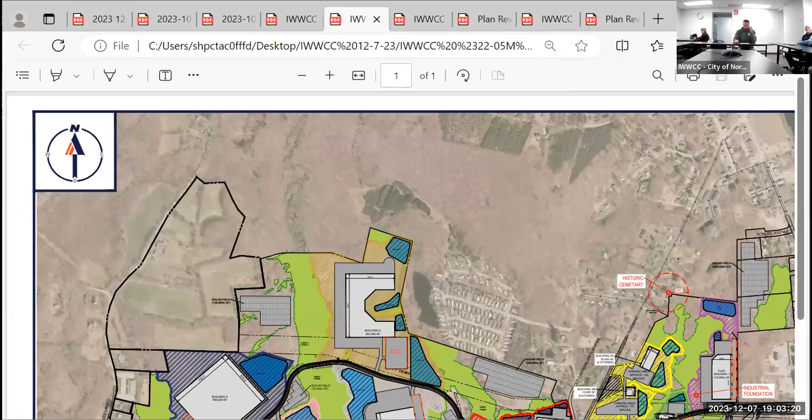As you recall, we were before this commission earlier this year for the approval of 7,700 linear feet of roadway spanning east to west from Route 97 to Lawler Lane. As part of that process, we coordinated with engineering, did the stormwater consistent with the 2004 Connecticut Stormwater Quality Manual, had E&S measures in place consistent with the E&S guidelines, and received approval from this committee back then.

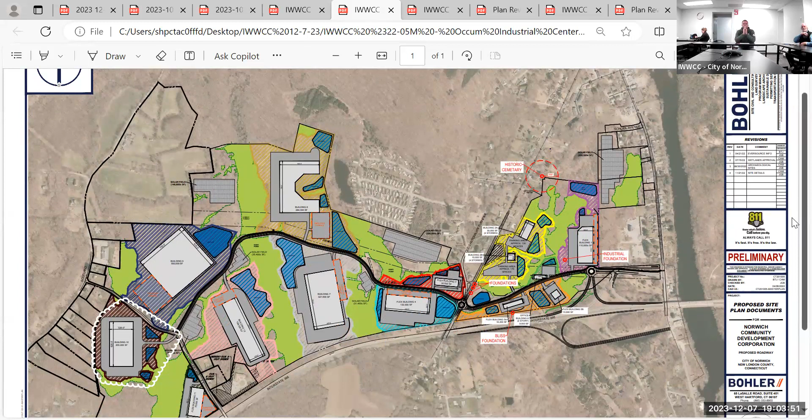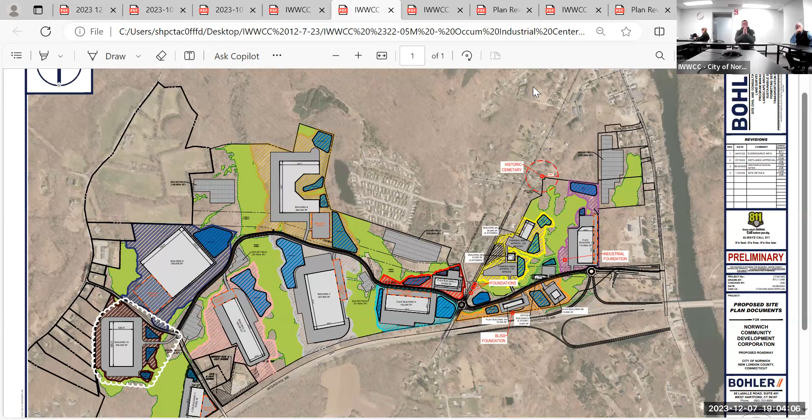We're here before you tonight amending that application, and there were just a couple of areas that Dan had highlighted. We highlighted them in white in the resubmission, and the changes are only limited to the terminus where Lawler Lane and the proposed road intersect, and basically that is a new driveway location that spans a narrow portion of the wetlands.

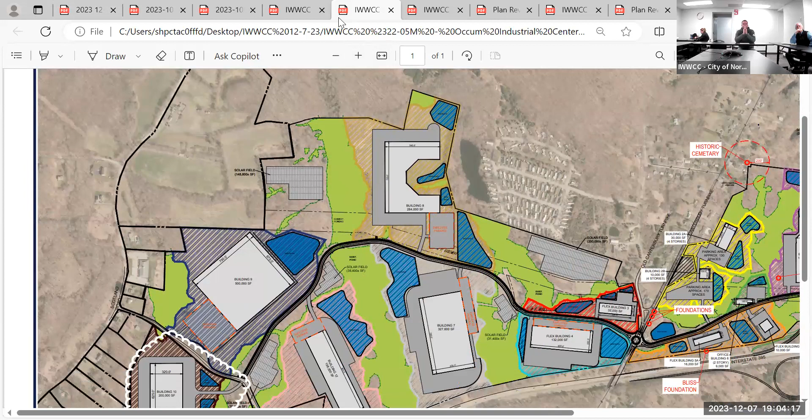There we go. So I'll explain at least a piece of it. That area you see in red, that brown shaded area, there's an additional 3,600 square feet of clear cutting in the upland review area. There are no direct impacts. In fact, we had a landscape architect look at what was within that area right off the side of the roadway. There's less than 3 trees, less than 8 inches in diameter, all of which are being choked out by invasive species and are over top of the existing power lines. So we felt it'd be a benefit, not only from a sightline and safety standpoint, but the clearing would just remove a couple trees that are prone to fall over the next few years.

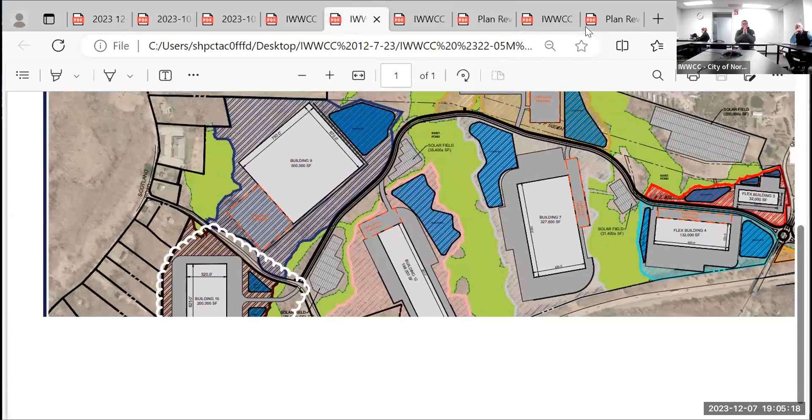Additionally, if you go back to the overall master plan, the only other change besides that 3,600 square feet on the entirety of the roadway was just one driveway right between the 2 basins that lead out to building number 10. You can see there's a new driveway that crosses the narrowest point of the wetlands, similar to what we did for building 12 and lot 5 on the right-hand side. It'll be a small crossing designed as part of the design process once an end user is selected. Other than those 2 things, the rest of the road stayed the same. The only difference besides that we did for this plan:

If you recall, building 11 that's there, this is an older master plan. Building number 11 in the bottom left corner on Lawler Lane has been completely eliminated. We presented that to CCP, and that's being dedicated back to the city as open space, and it just consists of upland area and some wetlands, running adjacent to I-395. So there's no longer a building shown there. Those are the three minor changes we're making to the original approved set. So nothing from Lawler Lane to the east back to Route 97. I'd be happy to answer any questions that you have for me.

So there were only 3 trees under 8-inch caliper? Yep, it's less than or equal to 8 inches. Okay. From what we saw. And how are you going to go through the wetland area? Was that building 10, did you say?

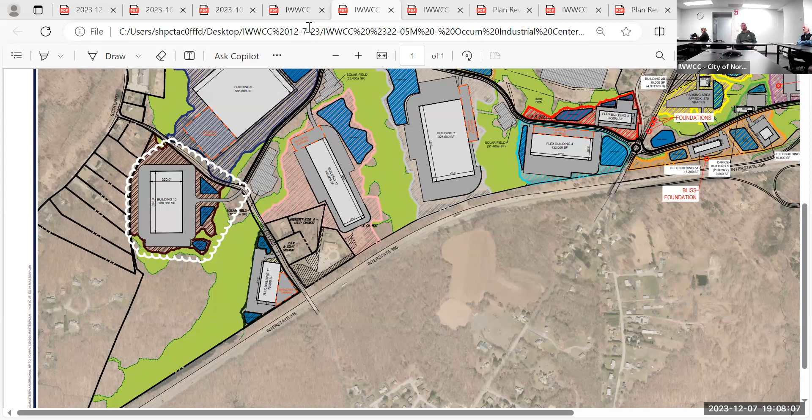And basically what you're seeing here is if you extended that silt fence, that line with the SF going straight up, once it hits the road on Lawler, that coincides with the sight line distance that's required for safety on somebody free flowing on Lawler Lane. Yeah, it's a little curvy there. Correct. With a stop control on our street. Which is what dictated this change. Correct. And then that's when we went out and looked at what would be coming out as part of that clearing to see what impacts it would have. And that's when we made those notes that I mentioned earlier.

You said staff looked through the plans, all appropriate. Everything else is the same. Everything else is the same, so just this. In the grand scheme, it's just back. Yeah, okay. I'm comfortable with it. Is there anyone from the public that wants to make a comment? There's no. In that case,

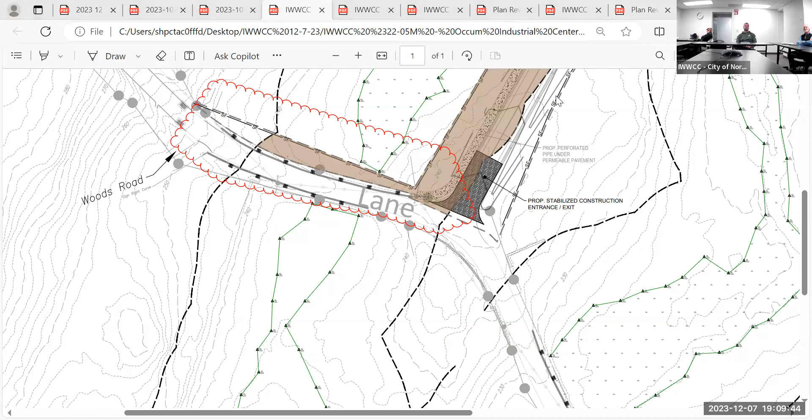Before we close it, I'll just go through my memo real quick. Well, first here is the exhibit list that I'll provide to the clerk. I'd ask just to waive the reading of that. It'll be in the video and in the record. And then my memo is very brief. There were comments from the city engineer in a memo dated 10/20. I don't know if you want to address any of those here tonight. I can bring them back up.

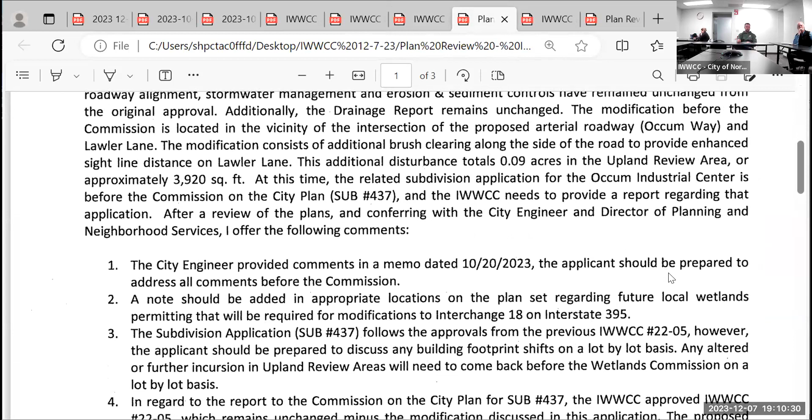I mean, we certainly can. I think there were planning comments, then there were engineering comments, all of which were relatively minor. A lot of people had comments on the cover sheet. We made some changes. There were several notes associated with the on and off ramps. For the engineering changes, there were 2 inlets that were asked to be converted to flared end sections. We made those changes. So the revised set came in, and then we issued a formal response to comment letter that addresses basically everything in the plan, but no substantive changes to any of the engineering design. So we got the revised plans tonight when they came in.

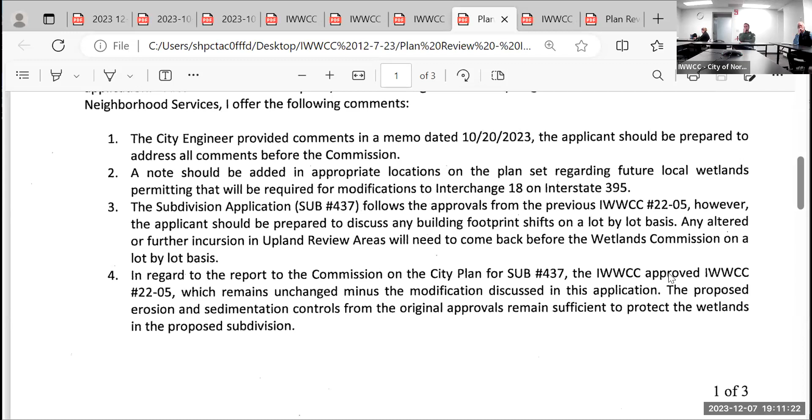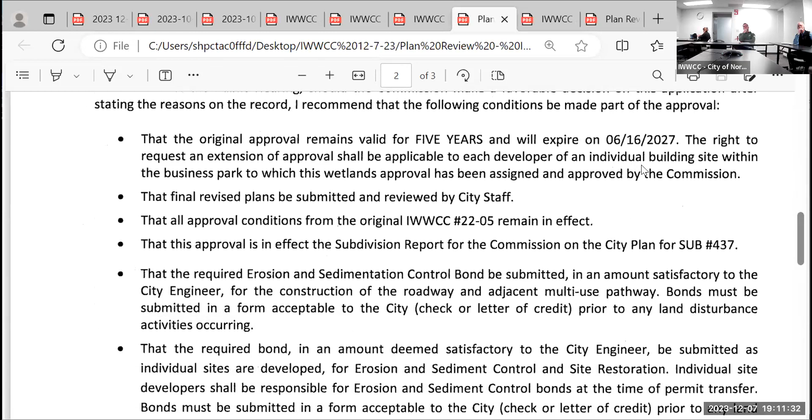And then my other things are just saying that the approval letters will go on the plan sets. This approval tonight is regarding your report to the CCP for the subdivision, which will be forwarded to them. And then this approval letter will go on that subdivision sheet, should it be approved later this month. And I'd ask to waive the reading of these as usual. If someone does make a motion to approve it, please include the notes from my memo. And the reason for the record would be the proposed E&S control is sufficient to protect the wetlands located throughout the project. That's all I have.

So is there a motion to close the public hearing? So one question, you just received a set of plans tonight, but they addressed everything that you wanted? Yeah, we've been in communication back and forth because the subdivision application is concurrent. They're waiting on your approval. Sure. So we've had revised plan sets going back and forth. Good. So I'm confident, and plus it's in here. Make sure the flow is there. Thank you, absolutely.

Is there a motion on the table? I move to close public hearing. For a second? Second. All in favor? Aye. Aye. Aye, unanimous, so.

Is there a motion to approve IWWCC number 22-05M with all of staff's recommendations? I move to approve IWWCC 22-05M, including the submittal list as submitted by Dan, as well as Dan's notes from his memo included. Second. All in favor? Aye. Do you have a reason? To include them. No, a reason. The last reason. Erosion control, erosion sediment control.

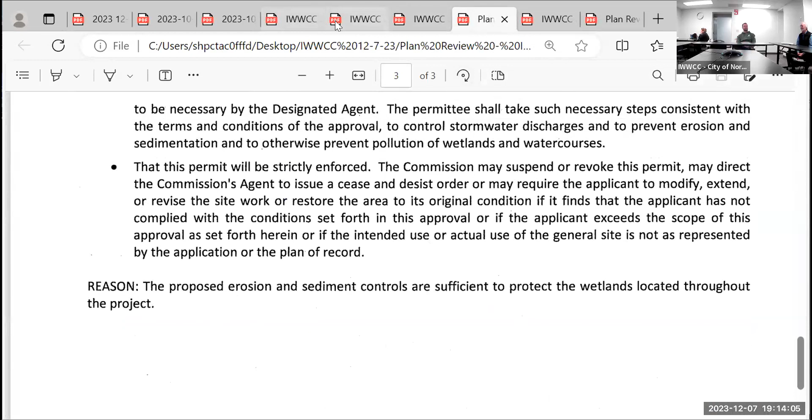You want to bring that memo back up? But you'd address the erosion in the memo. Sufficient to protect wetlands. I thought that was included in the memo. Okay. As proposed, erosion sediment controls are sufficient to protect the wetlands located throughout the project, as noted in the notes from Dan. Thank you. You're welcome. So I'll give you the second again. Okay, all in favor? Aye. Aye. Aye, unanimous, so moved. Thank you, Jim. Thank you very much. Have a good evening. Sorry, I thought that was included in this.

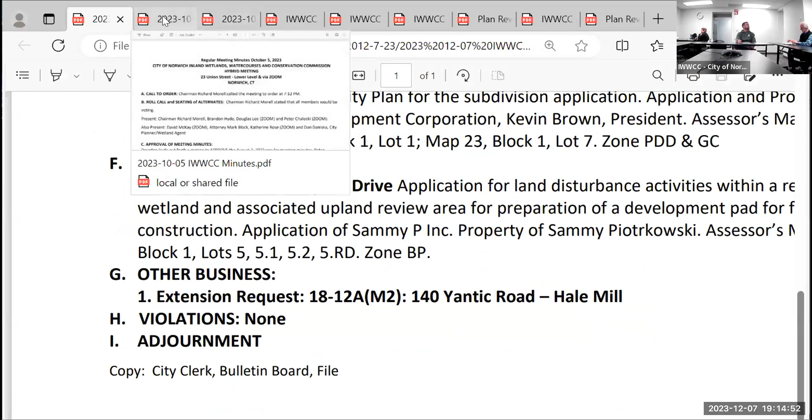IWWCC number 23-05, 0 Myrtle Drive. Sure. We have Dave McKay from Boundaries here. Just give these guys a minute to clear out. If we could start on sheet 2 of the site plan. So I'm gonna close what we don't need. So we'll start on page 2. Actually, that's pretty well there.

Good evening, my name is David McKay with Boundaries LLC. I'm here on behalf of the applicant, Sammy P. Inc. and the property owner, Sammy Piotrkowski. Our proposal is for the development of 0 Myrtle Drive with 2 commercial pad sites for future commercial development. Right now, the goal of this project is just to prepare this property to be usable for an undetermined future commercial use.

On the sheet here is our topographic survey, and there are 4 wetland areas on this overall property. One of them is located in Franklin. We have no activity within the upland review area of that wetland system that is adjacent to Elisha Brook. We also have a wetland area down right under where it says subject property in the city of Norwich. That area does contain a vernal pool. We are outside of the 100-foot upland review area of that wetland with all of our activity, and we have followed Army Corps of Engineers best management practices to protect that vernal pool.

In the center of the property, we have an intermittent watercourse that starts at the drainage discharge from Myrtle Drive and ends in an isolated wetland area located right to the east of the town of Franklin and city of Norwich town line. And then on the northerly property line in the sewer easement, there's another wetland area which we're maintaining a 50-foot buffer to.

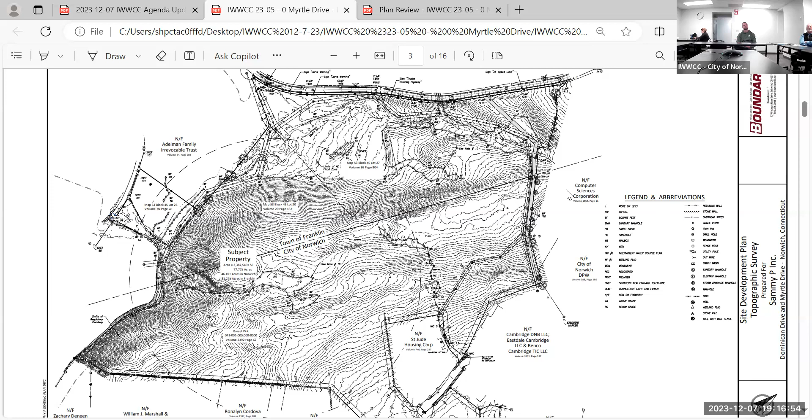Now we can skip down to sheet 6, I believe. Oh, actually, this is it right here, sheet 5. This is our overall site development plan. You can see the proposed access driveway starting right at the end of Dominican Drive where FedEx is located. Our smaller 1.4-acre pad site is directly behind the FedEx building, right at the top of the driveway, and then the larger 4-acre St. Jude Commons development.

When we had our site walk in October, we started at the cul-de-sac at the end of Myrtle Drive, walked down the path of the proposed access driveway over to the intermittent watercourse in the middle of the site, down to the isolated wetland area along the town of Franklin, city of Norwich town line. And you can see that area is proposed to be filled as part of this development, filling that isolated wetland and also relocating approximately 400 feet of that intermittent watercourse into a riprap drainage swale that will divert the drainage discharge from Myrtle Drive around the commercial pad site to the northern portion of the property.

Stormwater management on this property is proposed to be provided with 3 stormwater basins, one well outside the upland review area at the end of Dominican Drive for the smaller pad site and upper portion of the access driveway, and then 2 stormwater basins right on the city of Norwich and town of Franklin town line that'll collect the remaining runoff from the proposed development site and the upper contributing areas that aren't diverted in our proposed riprap drainage swale. Could you point out where they are?

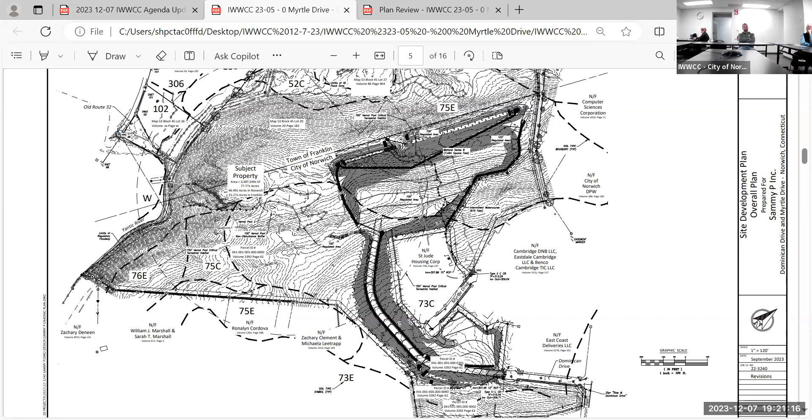If we scroll down to sheet 11, we have a series of staging plans for how we're proposing to develop the project. Here we go. So the gray hatched areas on each view are where grading will be occurring concurrently. So the first step for the project is going to be to clear the site, proposed total of 18.6 acres of clearing, and then use the grindings from the wood that's been logged to create a series of wood chip berms parallel to the existing grades, working its way up the slope to the top of our site.

Then after that work's completed, we'll have initial grading to construct our diversion swale and our temporary sediment trap at the end of the access driveway. And from there, begin the bulk earthwork to create the access driveway to get down to the pad site. Once that area has been rough graded and the slope stabilized, we'll move to the next stage, which is creating the stormwater basin 2 and southern half of the pad site. All the fill needed for this project is generated on site through the cut to create the access driveway.

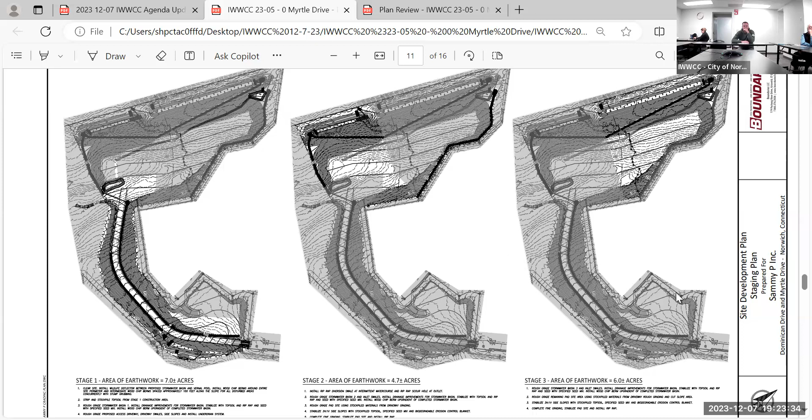Then once that area has been filled and stabilized, with erosion controls being adjusted as that grading continues, move on to the northern portion of the pad site, starting with the stormwater basin and upgrading erosion control measures, and then the creation of the level pad area. And then finally, after the driveway and the 4-acre pad site and all the slopes are in place, the last step will be finalizing the grades of the smaller 1.4-acre pad site. If you just scroll down to the bottom of the page, there's a little window that shows as we're working out of the site, finalizing with that area.

That's the general overview of the project. Be happy to answer any questions or go into specifics. All of the fill is from on-site. Yes, it's a balanced site. And there's a lot of boulders and surface rock there, and that's proposed to be crushed and used for the gravel surface.

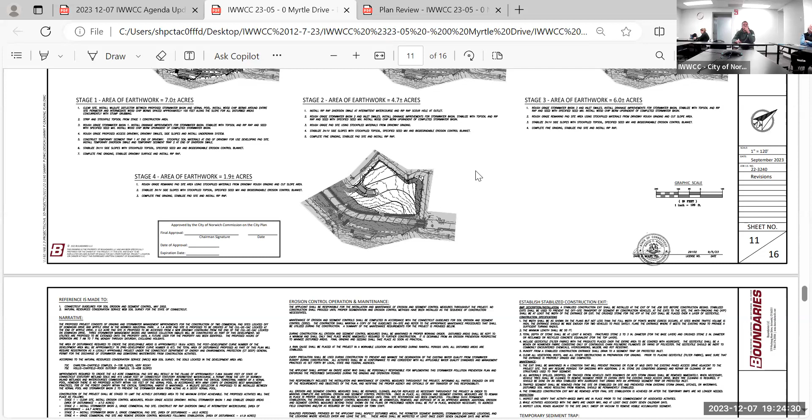And what other protections are going to be made for the vernal pool for the future on that property? You know, what's going to happen with the rest of that property? If you scroll back up to one of the overall viewpoints, that actually covers my work there.

So the standards that this plan follows are no disturbance within 100 feet of the vernal pool, and a wildlife deflector fence between the vernal pool and our work area. That's going to be along the limit of clearing, starting at the end of the driveway and running down to the bottom of the stormwater basin here. That's this line here. Okay. And that deflector is going to prevent any of the critters that use the vernal pool from getting into the construction area, and then afterwards the commercial area or the stormwater basins.

And then the last aspect of the vernal pool best management practices is maintaining 75% of the existing forest canopy within a 750-foot radius of that vernal pool. So this development here puts that at 75%. So there really is no other potential development that could happen on this property without exceeding that threshold. So this pad site here is about all they're going to get.

What material are you using for that deflector fence? There's a couple options specified. They could either fabricate their own with 18-inch diameter HDPE pipe. Basically they would cut that into half sections and then embed that in the soil and put those end to end through the project area for a continuous deflector. And then alternatively, there's a manufacturer, ACO Wildlife, who provides a very similar plastic arch that is the same thing. You embed it into the soil. And those would be permanent? Yes, those are permanent features.

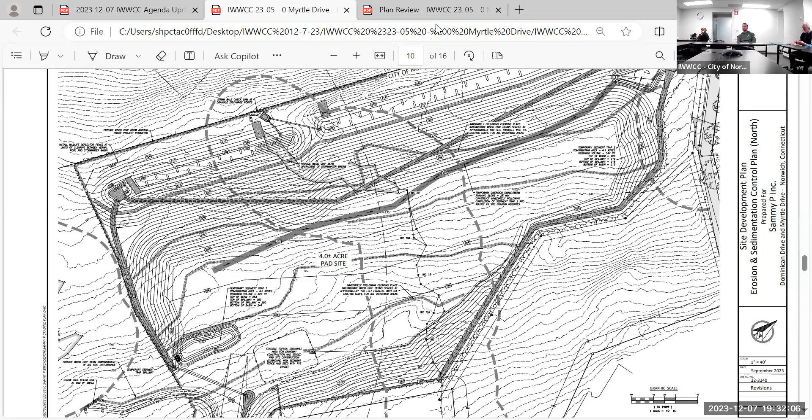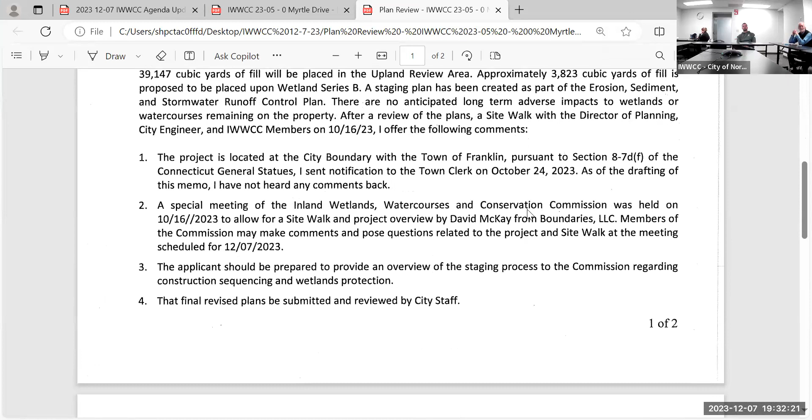Any further comments or questions? Hearing none, is there a motion to approve or not approve? I'll just note, if you can switch to the memo, Rich. Like I said, we referred to Franklin, we haven't heard anything back. We went on the site walk. Dave's very thorough, he talked about the staging and the sequencing. And I just ask that if someone makes a motion to approve it, that we leave out the reading of all my notes but include them as part of the motion. And the reason, as usual, would be the proposed E&S as sufficient to protect everything on the site.

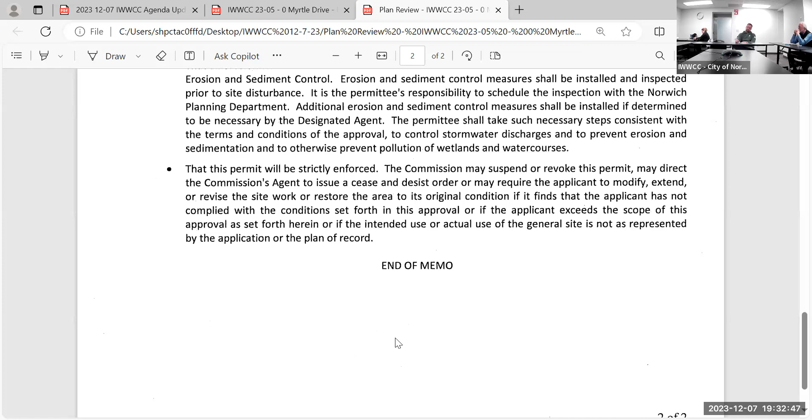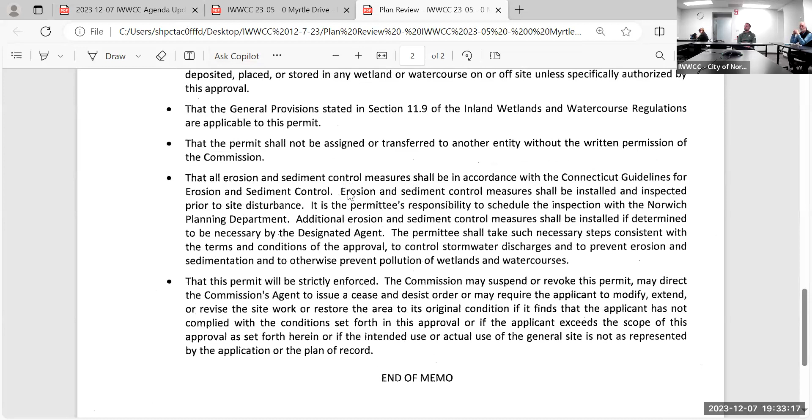So I move that IWWCC 23-05 be approved, taking into account all comments in the memo by staff, and in recognition that the existing E&S controls remain adequate for the proposed scope of work. There's a motion on the table, all in favor? Aye. Pete, aye. Aye, unanimous, so moved. Thank you for your time this evening. Thanks. Thank you.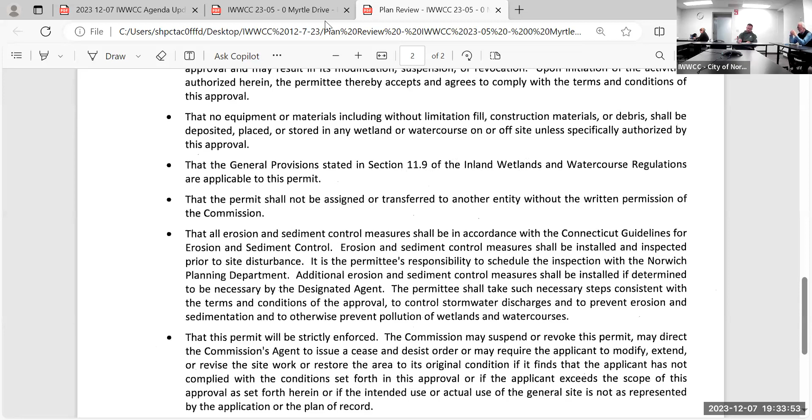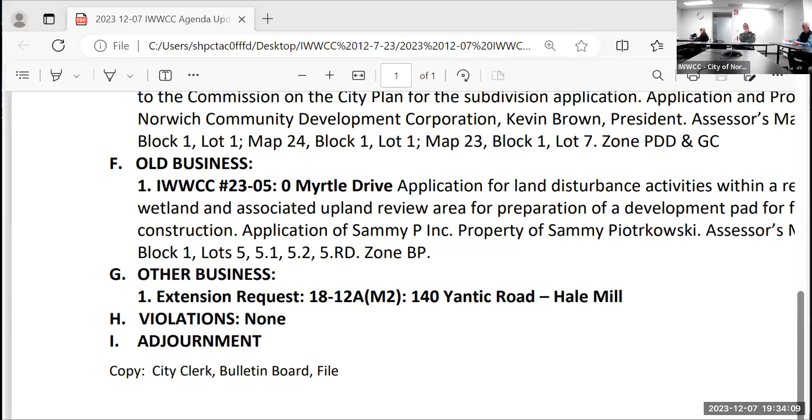Other business, extension request 18-12A, 140 Yantic Road, Hale Mill. One second. So this is the Hale Mill, which has been modified multiple times. Their original approval is expiring and they need a brief extension, which this letter states, because they're coming back. You're also gonna receive an application to modify it again next month. If Brandon Hanfield's on, if he has anything to add for you. So can we remove the notice so we can actually read it? Yeah.

So Wetlands 7.9E allows you to extend it if work has been ongoing for some time. And they're coming in with a minor modification, which is actually favorable to the wetlands on the site, with less disturbance in the rear of the property. So they're asking for a renewal and not specifically an extension. Well, technically it expired yesterday, but we haven't met in quite some time, so it's a renewal of this one, because it was active, correct? Sorry about that, Dan. I was on another meeting. No problem. So it'd be more accurate to refer to it as renewal, not an extension. Yes.